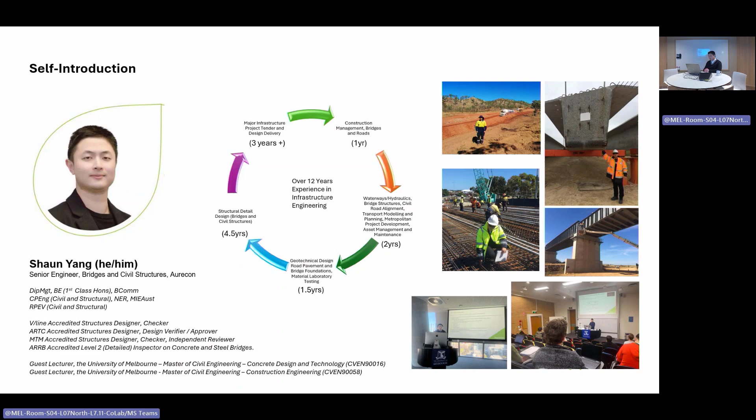Here are some key projects that I worked on in the past. I'm not going to go through them one by one, I just want to quickly go through some of the interesting aspects throughout my 12 years plus experience.

The first picture on the right is the Metronet Ranford Road Bridge, known to be the longest single span simply supported precast pre-stressed concrete Tee-roff bridge beam ever built in Australia. The bridge consists of 10 Tee-roff girders, each weighing about 200 tons. 3 heaviest cranes were utilized to assist with the lifting of the beam. It was one of the amazing experiences in my last 12 years career, getting to participate in tender design and then detail design and finish the construction support for a multi-billion-dollar project.

On the right-hand side is the Armadale Access Alliance underpass structures. I want to share that as a structural designer, we don't just deal with boring reinforcement details or big chunks of reinforced concrete and steel. We also work with a whole list of teams contributing to architectural design and landscape detailing, and as part of our structural deliverable, we work with urban designers to make positive contributions to the local community.

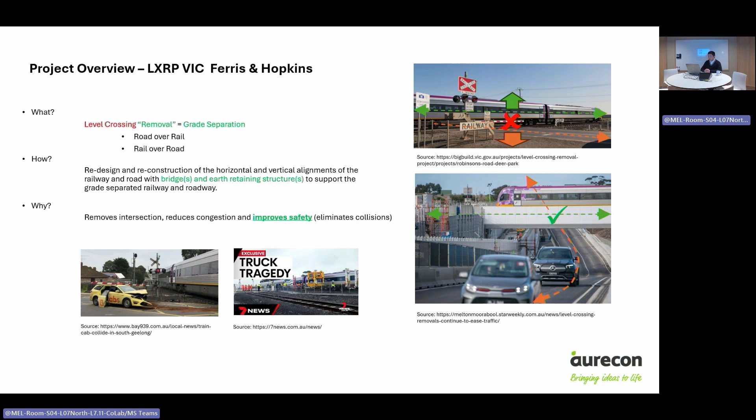This is the Robinson Road site. Previously the level crossing had the V/Line train line running, intercepting with the road traffic. Aurecon was the structural designer of this project, and we basically lowered the roadway under the ongoing train line, eliminating the potential collision between the two alignments. This project was completed in 2022 and is open to traffic.

Aurecon delivered the design and construction support for Fitz and Rob in 2022 and 2023, and continues the design work for Hopkins and Ferris.

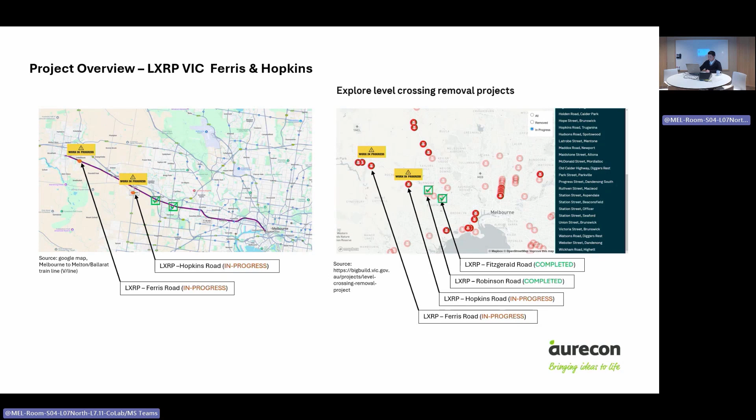So basically, the design team will propose the alignment, and then we'll come up with the 3D images, and then we'll go out there and consult with the community, the council, DTP, and the end road users. So each site can be slightly different due to its road and rail boundaries.

As you can see here, for Hopkins Road, the new alignment is actually significantly away from its existing alignment. This is proposed to accommodate the future traffic growth and future-proofing the duplication of the bridge and the road. Whereas for Ferris, due to the constrained site condition, the new bridge is pretty much adjacent to its existing road alignment.

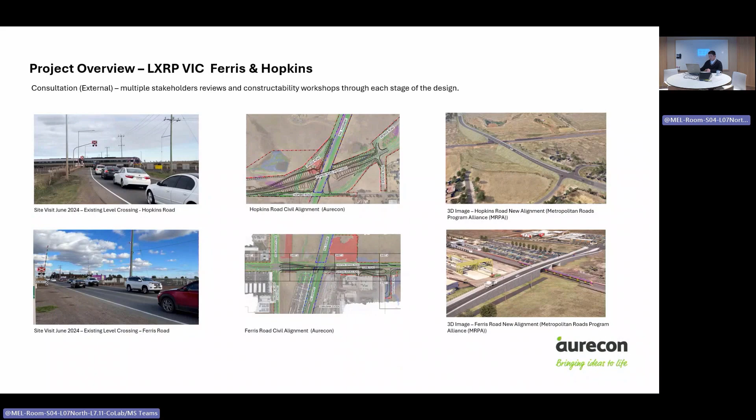Okay, so we talked about external consultation. Let's talk a little bit more about internally. As a design team, what do we do?

So bridge design is not just about providing a span from point A to point B. We have to do a lot of the design interface to make sure that we meet all the required geometric requirements, sustainability targets, durability requirements, etc.

And then we do clash detections at every stage of our design. We have to do system engineering. And then we also have collision protection assessment and workshop with our client.

Then we also need to participate in the architectural and landscape design. Like I mentioned, the bridge is all about functionality, but also we need to make sure that the aesthetic appearance of the bridge ties into the local community and ties into the local culture.

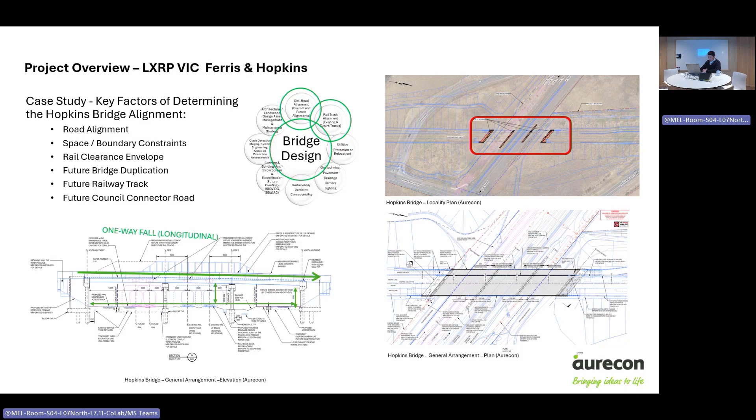So this is our governing location to set out the bridge. And then this information needs to be communicated with our civil and rail team.

From Civil's perspective, the civil design team will provide us a design string in Civil 3D, which shows the reference points at the top of the asphalt adjacent to the curb. The rail team will provide us the top of the railway track, and the required rail clearance envelope. Then it's up to the structures team to assess what's actually happening between the two.

The structures team needs to come up with the physical depths of the superstructure, and we also need to understand the behavior of the pre-stressing girder in composite with the deck slab, and how it behaves in the long term due to concrete creep, shrinkage, and pre-stressing losses in tandem. Then when there is live traffic on the bridge, how much does it sag? And what happens when the substructure settles in the long term, and how much construction tolerance we need to agree between rail and civil team.

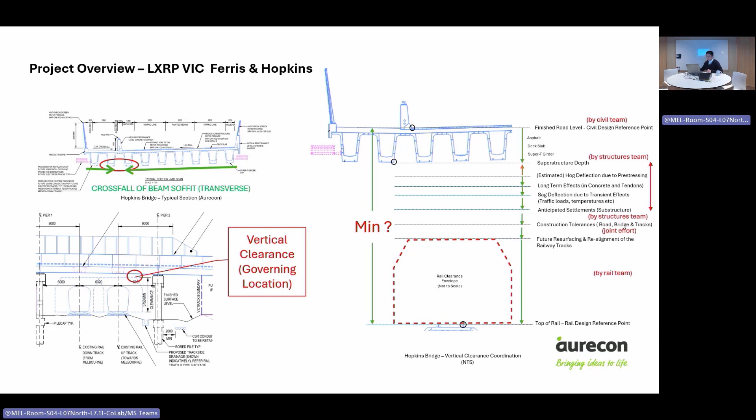So this basically gives you guys a bit of a taste in terms of design interface between internal design teams.

The 3 components get built by anticipated construction staging, workshopped with our delivery team from MRPA. The structural bridge design needs to meet all the project requirement scope and specification, and all the requirements in AS5100, which is our bridge code. The structural design considers the ultimate limit state, serviceability limit state assessments, fire effects, fatigue assessments, and so on.

So a lot of people may be asking, as a designer there are many commercial programs out there, so why do we choose MIDAS? Just as you start getting familiar with how to use MIDAS, MIDAS has a new fancy program called MIDAS NX. Why do we continue changing it? I'd like to share from an end user's perspective.

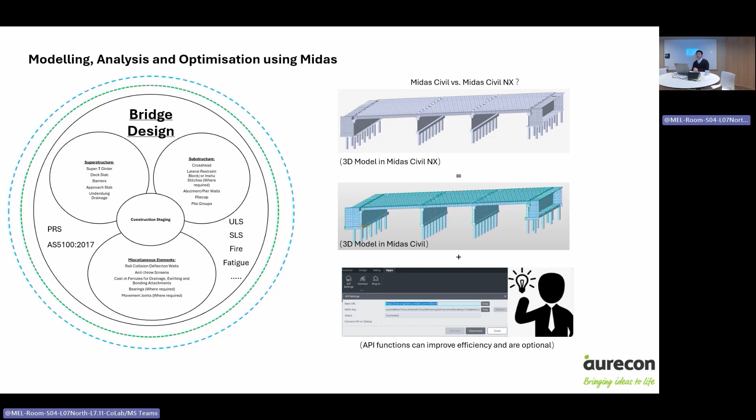MIDAS NX is pretty much MIDAS Civil plus API functions. So any MIDAS Civil models can be operated in MIDAS NX, but API functions can only be operated in MIDAS Civil NX. These API functions are here to improve efficiency where required, and they are optional.

Before we get into the modeling using MIDAS, I want to highlight that this presentation is not about how to use MIDAS 101. I'm here to provide some insights into how the MIDAS program can benefit our day-to-day bridge design as a MIDAS end user. I do not believe I can do a better job than the MIDAS support team or the MIDAS IT team.

When it comes to teaching beginners how to use the MIDAS program, there are many useful tutorials, and I do not wish to embarrass myself here or repeat steps that you can easily find online. My philosophy is always that as a design practitioner, we learn on the job and solve problems by picking up design skills.

So I want to spend most of the time focusing on the end results - how do we actually implement some of the features available in MIDAS to help improve our design efficiency and accuracy? First of all, just like at the start of every single job, when you get into a new design project...

I always make sure my team of engineers is aware that MIDAS is a design program here to help us, but the designers or end users should be responsible for the accuracy of the model they produce in MIDAS. We can't simply blame a black box when we're not sure, and think we'll just click the button - garbage in, garbage out - and get the job done. That's always not the case.

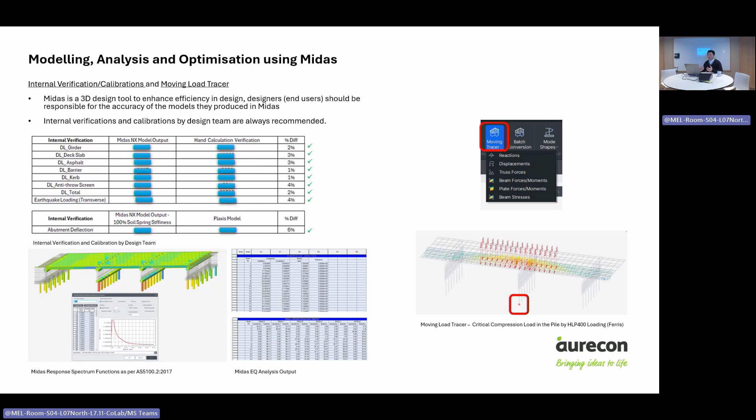I'll go a bit more into this function just to talk about how MIDAS differentiates itself in this area.

Okay, so I mentioned that we're going to talk about the moving load tracer. MIDAS offers this moving load tracer, but in addition to a common feature that you can find in other programs, MIDAS also helps us fast track how we fit the critical or corresponding load pattern into the next stage of our design.

Back in the days when we carried out the design of a bridge superstructure and substructure, when the bridge is simply supported on bearings and supported on substructures, we may choose a different program to carry out our grillage model. Then we record the reactions and manually input that into our 3D substructure model. This is time consuming and has potential for errors due to human error.

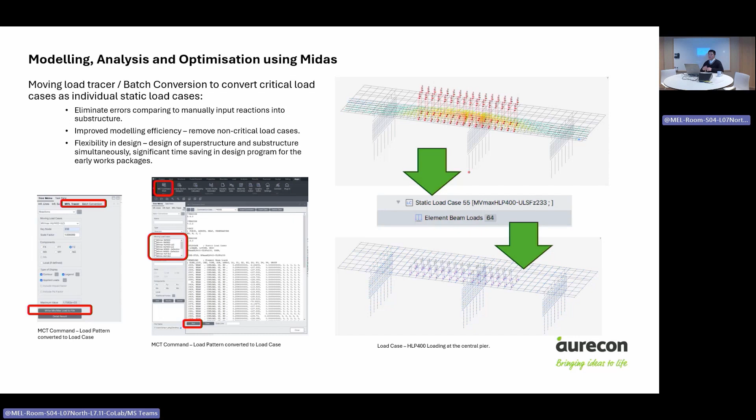Another very powerful feature of MIDAS is the construction stage. I'm sure everybody is familiar with this function, so I'm not going to go through the steps of how to set it up. I just want to quickly show some of the main steps we actually use in our design.

Starting on the right here, the first one is the substructures only. Using this stage, we can introduce a sub-stage to look at how much backfill and how we backfill behind the abutment wall, and see what the actual design deflection is versus the allowable deflection. We were able to workshop with our construction team and come up with the most optimized construction sequence.

The next stage is when the pre-stressed beams are lifted in place, simply supported on the bearing. We'll then have the wet deck concrete loadings. Again, because we separate the stages and understand the support conditions, we were able to accurately reflect the wet deck concrete loading to align with our actual deck casting sequence.

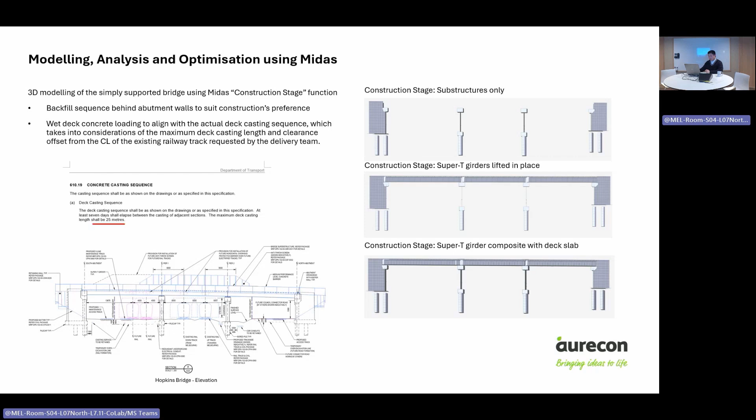The deck casting sequence needs to comply with the DTP specification 610, with a maximum casting sequence length of 25 meters. We also workshopped with our construction team to make sure that the joint between stage 1 and stage 2 achieves the minimum offset requirement from the existing railway track, and that was then captured in the 3D model.

So some of the interesting findings that we got from the 3D model. First of all, I want to mention that because it's a 3D model, it helps us look at how the structure is behaving in multiple dimensions, instead of just the 2D model that we're showing on the left-hand side here.

One of the main findings was that because of the heavy skew with 8 to 9 meters of backfill at the back, and the significant cantilever abutment wing wall constructed monolithically with the abutment wall, the soil pressure with the load combinations specified in AS 5100 Part 2 actually causes a push and pull effect, causing significant tension in the piles at the back end. This would never be clearly defined if we simply had a 2D element modeled in a 2D plane. That was one of the very critical benefits we got using a 3D model in MIDAS.

In addition, we also need to assess the anticipated deflection of the abutment wall and make sure that the deflection meets the DTP BTN 023 foundation and soil supporting structures requirements.

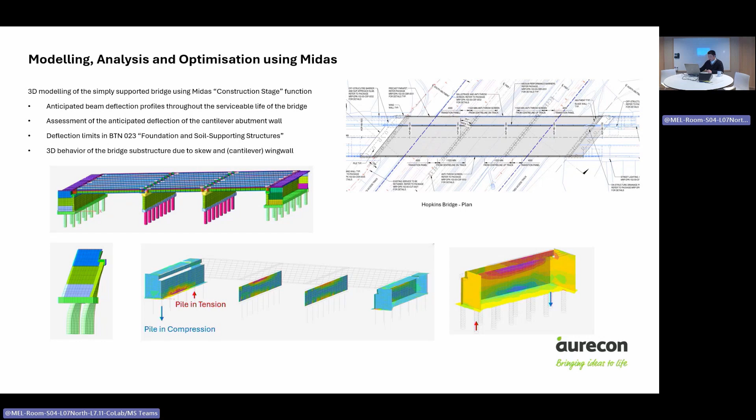So the next one is moving on to the Ferris Bridge. Ferris Bridge is a continuous two-span bridge, continuous at the central pier, integral at the bridge abutments. The construction staging again helped us understand the backfill sequence and the limitations we needed to workshop with the construction team. Then we again looked at the 3D behavior of the bridge due to the skew, the integral abutments, and the continuity at the central pier.

This is not optional because as per the DTP BTN 010 integral or semi-integral bridges requirements, we actually need to investigate the creep, shrinkage, and differential temperature settlement, and also earth pressures in stages, making sure we cover both the short-term and long-term effects for an integral bridge. This is why we modeled the 3D models for Ferris Bridge as well.

Some of the interesting findings based on the 3D model: first of all, if today, without the construction sequence, we just proceeded with our grillage model with frame action, then the frame would recognize the composite behavior from day one, meaning the weight of the deck slab would be supported continuously. What this actually does is reduce the actual sag bending and create an unrealistic hogging bending at the central pier as well as the abutments.

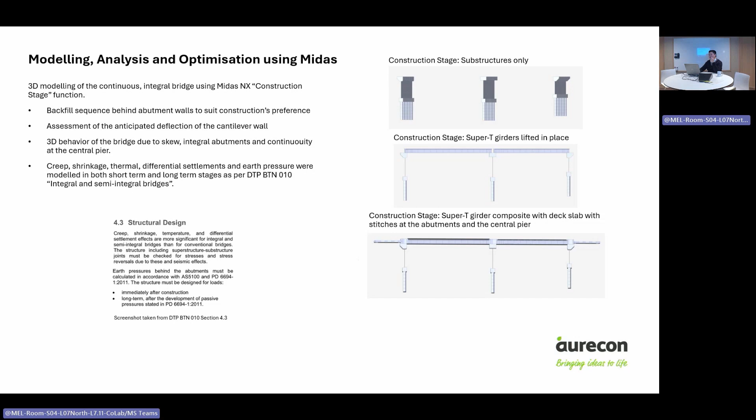As we all know, Super T girders are great with resisting sag bending moments because we can put more and more strands, multiple rows of strands, at the bottom flange of the Super T. But the Super T composite section is weak, or not as efficient, in resisting hogging moments. This is one of the typical challenges we have when we have a continuous bridge.

A lot of the reinforcement needs to be squeezed into a very narrow 200 mil deck slab, which is this area here. So by having clear construction staging and a clear wet deck sequence, we were able to find out the actual realistic sagging moment, which made sure the Super T were not under-designed for the midspan sagging. We were also able to detail and provide very efficient structural detailing for the deck slab at the critical hogging zones at the pier as well as the abutment.

This bridge was also assessed in close detail for fatigue assessment, because there is a rigid moment transfer at the pier as well as the abutment, with multiple sectional property changes as we progress throughout this support location. We found that the fatigue assessment basically governed multiple locations at the bridge pier as well as the abutments.

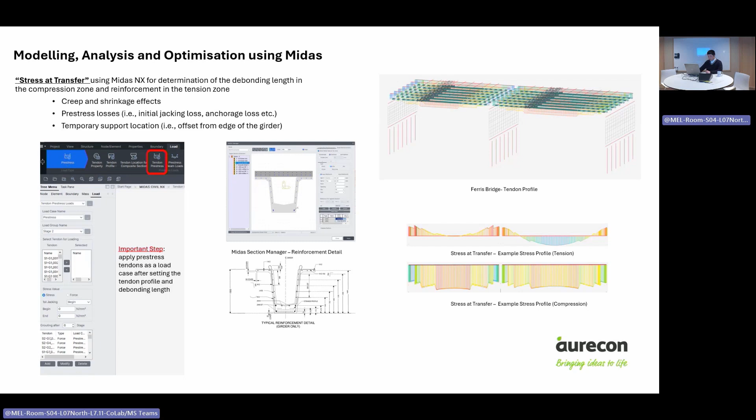Look, this is what I always talk to my teams, the junior engineers, is MIDAS needs to earn our trust, just like any program. So we need to carry out our own verification to satisfy ourselves that the output generated by MIDAS is satisfactory to the design team. So stress at transfer is not difficult to verify.

We just have to consider the three main components: the axial compression due to the tendon, the moment, the clockwise moment due to the tendon force, and the eccentricity to the girder. And we also need to consider the self-weight of the girder.

And on top of that, we need to make sure that we calculate our stress development and the transmission lengths as per 5100, pre-stress losses, short-term and long-term as per 5100, and align with our MIDAS input, and also consider the modular ratio transformed between concrete element to steel elements in the calculation of the neutral axis.

And again, very lastly, to everything above this point, we will get an approximate stress. With assessments of elastic deformation losses, we will get results pretty closely aligned with what we can model in MIDAS. So this is just to assume that compression is taken to be positive and tension is negative. We can quickly run these calculations in our own Excel spreadsheets to verify the output.

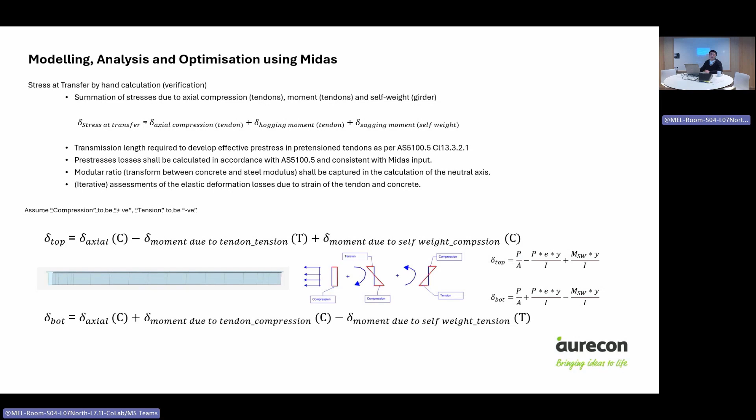Basically, start documenting when the girders get manufactured, stored on the storage yard, and then lifted on site, lifted into place on the bearing or stitched with the continuous structure. And I also listed out how it's actually relevant to our design.

So for example, at stage 2.2, when the girder gets lifted onto the elastomeric bearing, then we need to make sure that the set out of our bearing level and the pedestal levels have been checked and are meeting the design intent. Then we also have stage 3.3.

So deck slab achieves the strength and achieves a full composite section. So when you calculate the beam, the superstructure deflection, you need to consider the composite section. And then lastly, in the long term, during the entire design life of the bridge, which is usually 100 years design life, we need to make sure that the bridge does not encroach into any rail envelope.

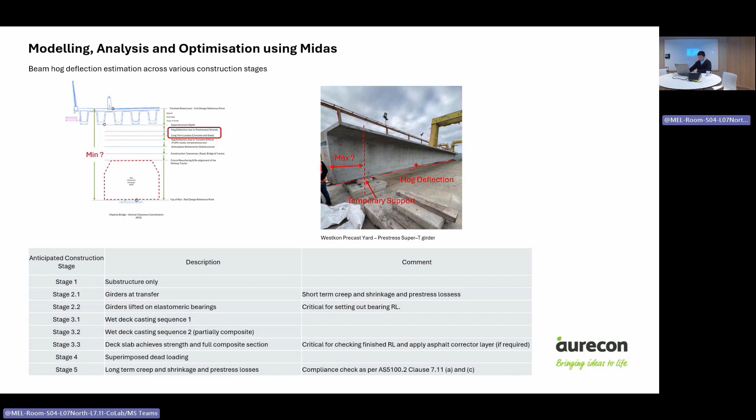Okay, so this diagram here basically gives a bit more intuitive understanding of how the pre-stressed girder works. So starting from the second line here, the girder gets manufactured and stored on the precast yard.

Then the concrete is still developing strength, and also creep factor comes in. The development of the beam hog is still continuous. Going to the second line here.

Then just before the wet deck concrete gets poured, it will achieve the highest hog of its serviceable life. Then once you have the wet deck concrete, it will then compress and cause the beam to sag. And then once the deck achieves its required strength, it becomes a composite behavior.

So the Super-T girder composites with the deck slab structurally. Then we have the superimposed dead load. So this is the barrier, the parapet, asphalt, asphalt corrector layers, etc. So then that will cause the beam to sag even further.

Now, the bridge will then open to traffic once all the road furnitures are in place, and then we will look at the long-term concrete creep and shrinkage and pre-stress losses throughout the design life of the bridge.

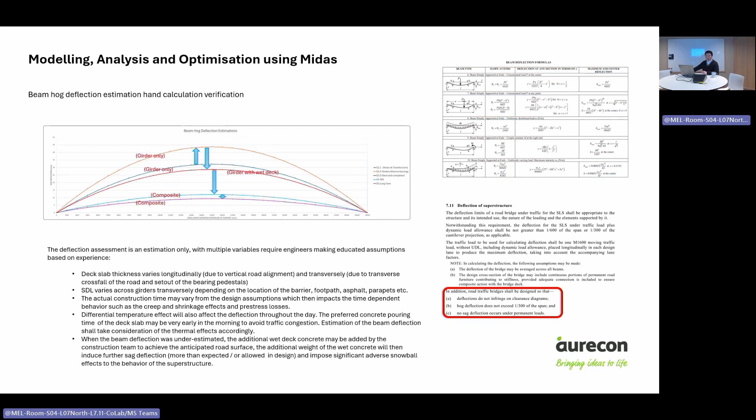We need to make sure, based on our experience, how much contingency and additional structural allowance is needed, working with our team to ensure that under permanent loads, this line does not fall below zero.

So, how can MIDAS help us? Once we understand our construction sequence and know what we want to understand at each staging, we can model these 3D effects in the MIDAS program. The beam hog deflection has been modeled in MIDAS to account for concrete creep and shrinkage, pre-stress losses, the varying deck slab, the skew of the bridge, and the differential temperature effects.

On the left-hand side is a quick example showing that the deck slab of the Hopkins Bridge actually varies significantly both longitudinally and transversely, a total of 90 mils difference between the western and eastern edge. When we model that in the design program, we find up to about 5 millimeters difference in the hog deflection.

On the right-hand side, we model the hot-top and cold-top thermal effects as individual load cases to see how much change occurs due to these thermal load cases. Below that is an example of the Ferris integral bridge, showing the beam hog at a specific construction staging.

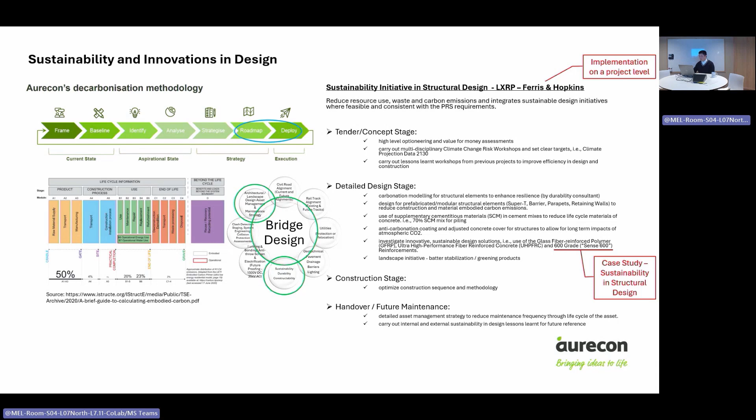Okay, so the case study using Sense 600 reinforcement in the rail collision deflection wall. This is pretty much basically instead of using the grade 500 reinforcement, we're now using the 600 reinforcement. This is likely to be the first time we use the 600 grade reinforcement in a level crossing removal project.

I think it's worth mentioning big acknowledgement and recognition to the asset owner DoT. They have been very supportive and provided requirements and guidance to work with the design team, and also helped us go through the formal approval process and made it happen. There were some specific requirements around manufacturing welding procedures, and we were able to workshop that with the construction team, with the asset owner, and get agreement among all the parties.

The rest of the photos here show that the deflection wall has been modeled in a geotechnical pile group model, calibrated for the soil spring, and used for the design actions for the rail collision. On the right-hand side, the structural model in MIDAS 3D with the spring sensitivity assessment, just to make sure that we capture the dynamic behavior of the rail structure interaction.

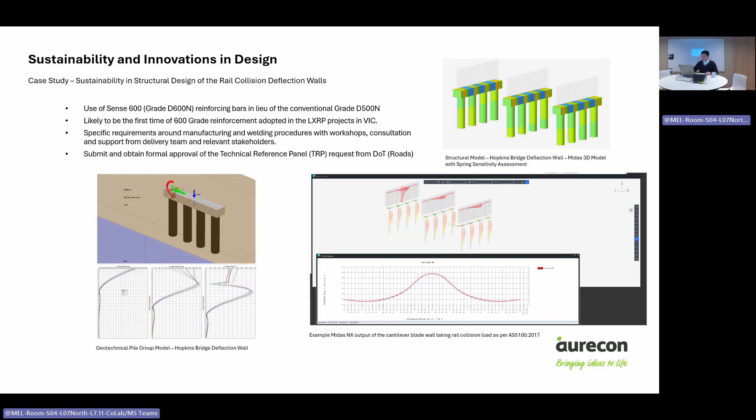So how does Sense 600 deliver a lower embodied carbon construction solution? First of all, it's a code compliant product manufactured here by InfraBuild. The SENS 600 is made out of 100% recycled steel. It uses approximately 16.7% less raw material to produce the product with the same load capacity compared to grade 500. The adoption of SENS 600 can reduce the embodied carbon in a structure by up to 39% through weight reduction and recycling.

This is just a couple of photos showing that they look slightly different in terms of shape. InfraBuild also provided us a conversion table to show that if previously we were using grade 500 for structural detailing, what is the equivalent in the 600 grade reinforcement.

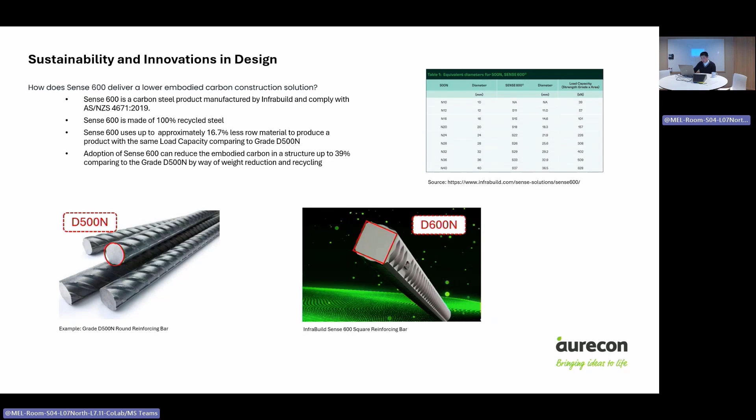Now, as the structural designer, we need to make sure that every time we adopt a fancy new sustainable solution, we capture all the flow-on impacts. So as the structural designer for SENS 600, we also need to make sure we understand what is changing between SENS 600 and grade 500.

So the SENS 600 obviously had the increased yield strength, reduced steel cross-section, which is provided in this diagram here. We have to go check the revised calculation of the longitudinal strain and the coefficient KV.

So AS5100 adopts the modified compression field theory for shear, torsion, and moment combined design. We need to understand how that impacts our capacity calculation, and make sure we revise our calculation of the angle of inclination between the concrete strut and the longitudinal tie strain. The revised calculation of the concrete contribution and the reinforcement contribution then gets reflected and assessed accordingly, to make sure the SENS 600 is structurally adequate to resist the rail collision load as per 5100.

Okay, so we're now moving to the last part of the presentation. Very quickly, everybody has been asking me, what's the difference between MIDAS Civil and NX? We'll quickly step through that.

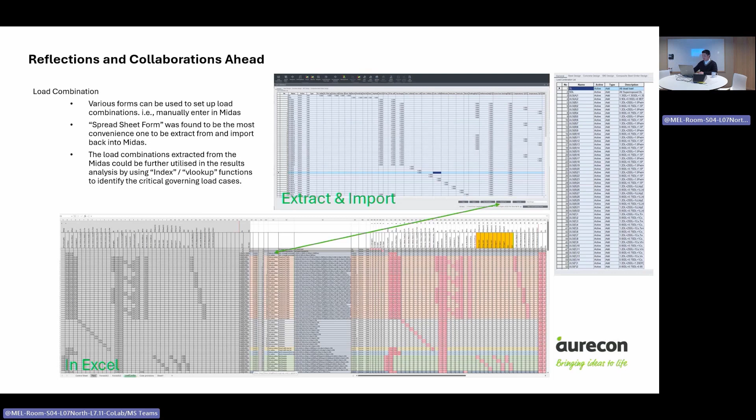The next one is MIDAS also offers sorting out the results, instead of extracting into Excel, which gives you a little bit more flexibility, but it's more time consuming. It allows you to actually filter through all your calculations within MIDAS.

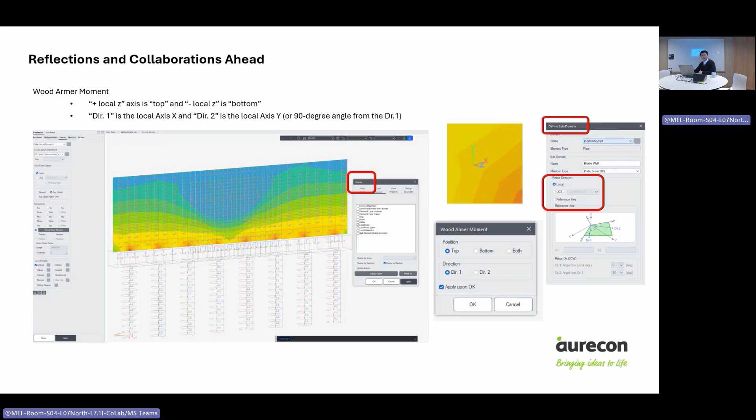And we also use Wood Armer Moment quite a bit for detailing of moment elements subject to bending. I've basically listed out the default setting within MIDAS, and obviously if designers require to overwrite some of these default settings, MIDAS has already provided these options.

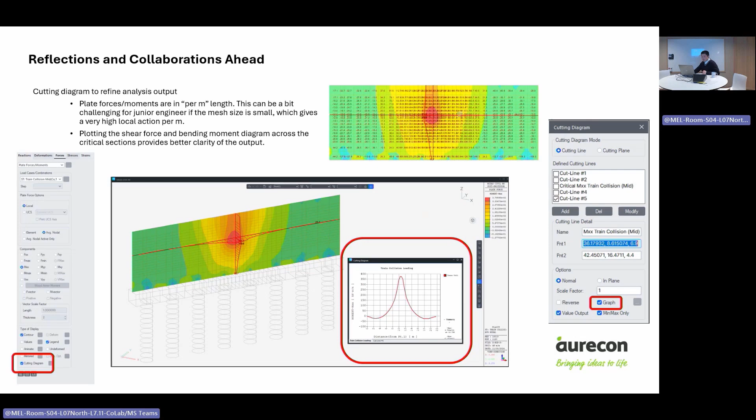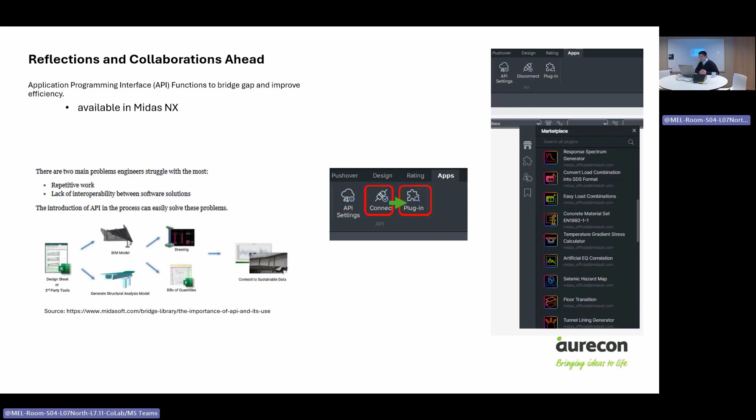Okay, so very quickly to wrap up the presentation, we talked about the API, and I just want to quickly showcase what the API function can do. So API basically helps us reduce the repetitive work and helps us operate between different software, calculation programs, Excel spreadsheet, etc. MIDAS has already provided a very comprehensive marketplace to showcase these API functions, and to fast track a lot of the design process.

I'll use myself as an example. I asked a lot of questions. So in 2022, MIDAS gave a presentation to all the design teams here in Melbourne. David and Connor actually gave us a very amazing presentation. I start asking questions, I start asking about functions.

One of the questions that I raised was, when we look at an envelope with 100+ load combinations, how can we quickly pick up what's the governing load factor and what's the load effects? So MIDAS was able to develop the associated API functions to enhance their performance. So Connor actually came back to me this year and said, look Shaun, I haven't forgotten about you, and this is the function that we created under the API marketplace, feel free to give it a go.

The program is very straightforward. Once you run the 100+ envelope, you can easily import the load combination and pick the element of interest, then select whether it's a bending, shear, or axial that you're interested in. Straight away it will then convert that into a load case in the load combination with all the associated factors for ULS or SLS combination.

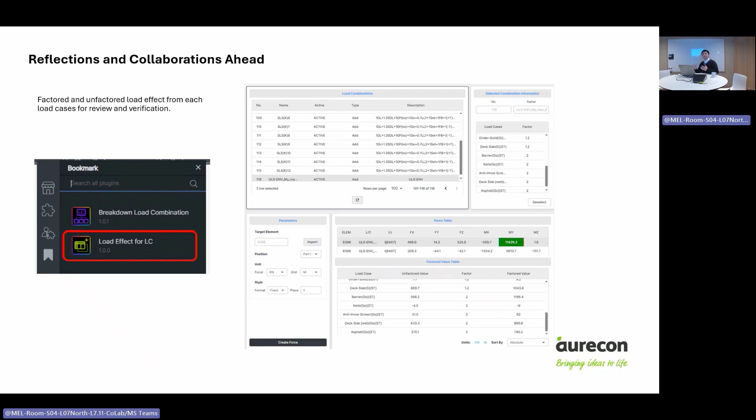In addition, what if you want to see the factored and unfactored breakdown of each load? How does it actually govern? So MIDAS also created a load effect for the load cases. This is a quick showcase where you can simply select this governing load case and select the element that you're interested in and confirm the units. It will give you the breakdown of each individual load that contributes to this governing design action.

Okay, so that was two very simple examples. Now I'm going to show you guys a bit of a game changer, a bit of a complicated API function.

So by pressing a single button, this PSC bridge model and analysis API function will be able to create a very complex, skewed, continuous bridge with longitudinal and transverse elements defined, with load cases, ULS, SLS, and load combinations, everything in one package by pressing one button. This is significantly more advanced than going through a manual modeling or a wizard.

And then by pressing another button, it does the automatic extraction of the results and the results diagrams, which enables a whole lot of functions that we can now use to fast track and automate a lot of the design process for bridge modeling as well as for structural detailing.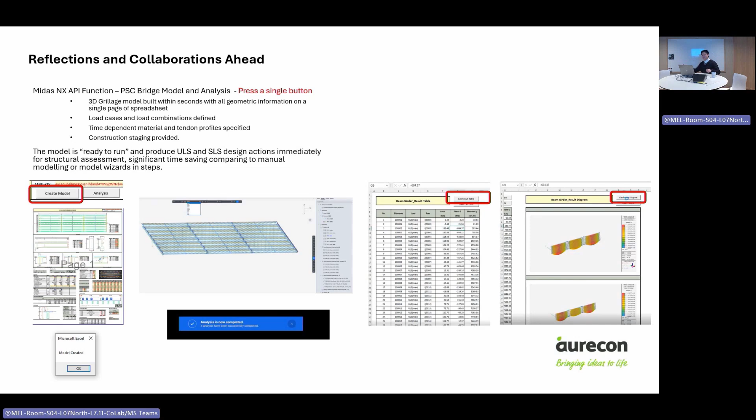And like MIDAS said, the sky is the limit. So moving forward, I think it's like the Tesla automation in driving. The machine learning needs more data. The designers need to provide more design data to optimize our designs, streamline the bridge modeling process, identify the gaps, and then customize the API function to achieve automation in design, with first principle verifications and responsibility by the designers, of course.

That's pretty much the end of my presentation. I'll quickly show a video that I obtained from MIDAS to show everyone that if you still have questions after going through all the online training tutorials, you can quickly log onto the MIDAS website, get help, click the program you're interested in, and submit your query. Usually they will provide a response within 24 hours. I can't promise on their behalf, but they have been providing very amazing support during our detailed design so far.

And that's it. Thanks for attending today's session. I hope everybody has learned something new and has some takeaways that you can think about after this presentation. Thank you.

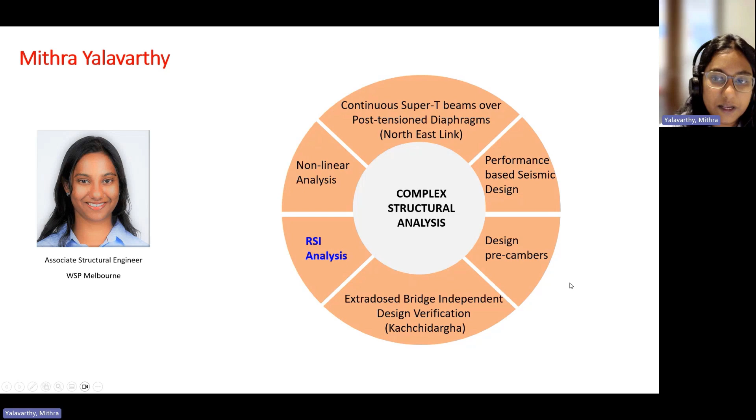Hi everyone, I'm Mithra Yalavarthy. I'm from WSP Australia, an associate structural engineer. I mostly work on complex structural analysis, either design leading the structures or being involved in complex engineering. I've done continuous super T beams over post-tension diaphragms in North East Link, with 40-meter spans of super T beams on either side, combined with a post-tension diaphragm transversely. I've also done extradosed bridge independent verification in Kachchidargha, nonlinear analysis, geometric and material nonlinear analysis, performance-based seismic design, pre-cambers, and RSI analysis, all using MIDAS Civil. I've been using MIDAS Civil since 2016.

So here is an overview of my presentation. How to do RSI is a simple aspect, but why to do it and how to mitigate is the one which will actually take a lot of time to learn. So today I will be concentrating on both of them, apart from giving a case study on Parkdale Viaduct.

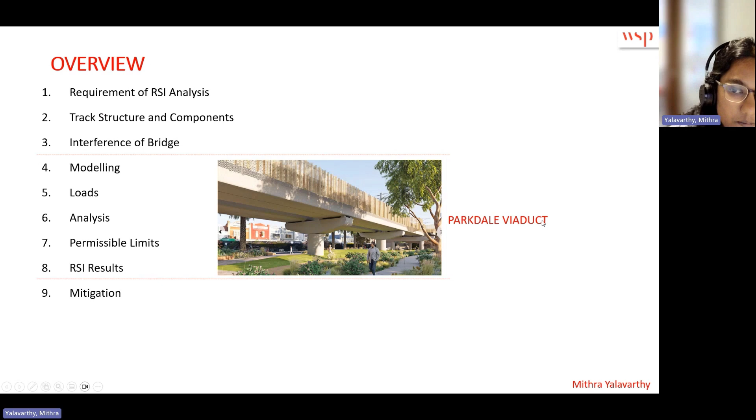So why do we need rail structure interaction analysis? We need this because we should know the distribution of longitudinal forces, and also we need to ensure the safety of the track systems. The difference between road bridges and rail bridges is the rail, which is connected stiffly with respect to the embankment as well as the bridge. That helps it act as an additional element in distributing the forces.

So we need to know the track structure and components before we go to RSI analysis. In rail bridges, we have a rail connected to the sleeper by means of a rail fastener. This arrangement can be sitting either in ballast or in the form of concrete. Here is an example of an MTM viaduct with ballasted track, and this is Dubai Metro with a trackform plinth.

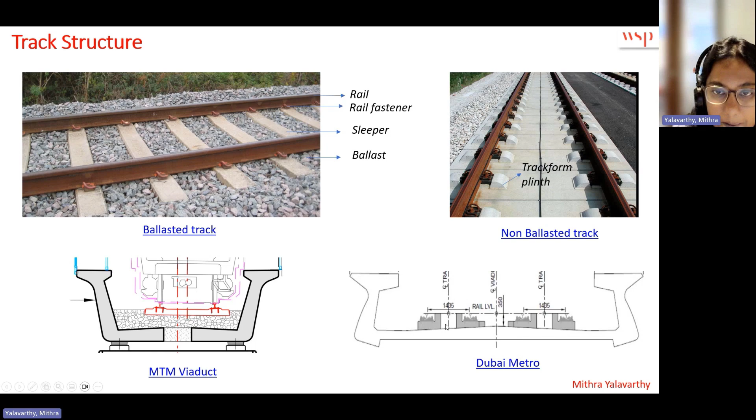In Australia, we use A60 rail sections with a height of 170 mm, a proof stress of 420 MPa, and UTS of 880 MPa.

It has a head, web, and foot, and this part we call the toe, where the fasteners put load onto the rail section. The standard rail lengths are usually between 12 to 14 meters, joined by means of fish plates like this.

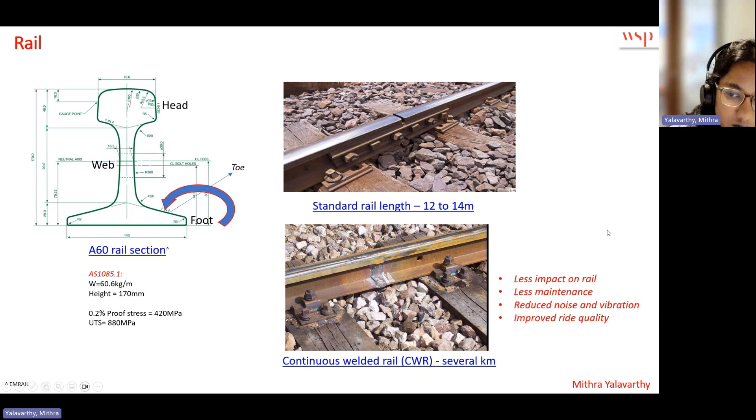In a continuous welded rail, the two parts of the section are jointed by means of a weld. This has less impact on the rail, less maintenance, reduced noise and vibration, and improved ride quality. In most current rail projects in many countries, we are using continuous welded rail, which can span up to several kilometers, with 3 to 4 kilometers being a normal range for CWR.

The sleepers are usually placed at 685 mm spacing, with a general track gauge of 1600 mm in Australia.

This is a part of main interest to us, which is mainly used in rail structure interaction analysis. This is called an E-rail clip, and this is an SKL clip.

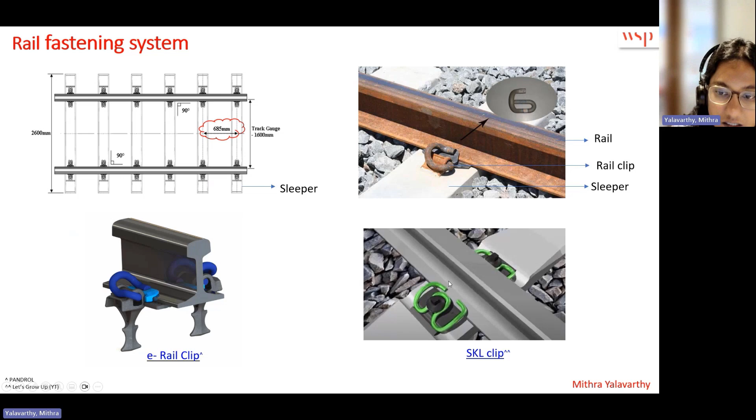The E-rail clip is a defined elastic clip steel spring, which produces a clamping force of approximately 20 kilonewtons per pair of fasteners. The horizontal resistance generated between this clip and the rail is what generates the friction between those two items.

That friction will be approximately 7 kilonewtons for mainline tracks and 9 kilonewtons for high-speed tracks, all dependent on clamping force. Because of the predefined clamping force of the E-rail clip, it has a predefined limited horizontal resistance. In case we want a better fastener with better frictional forces or clamping forces, we can use alternatives to the E-rail clip.

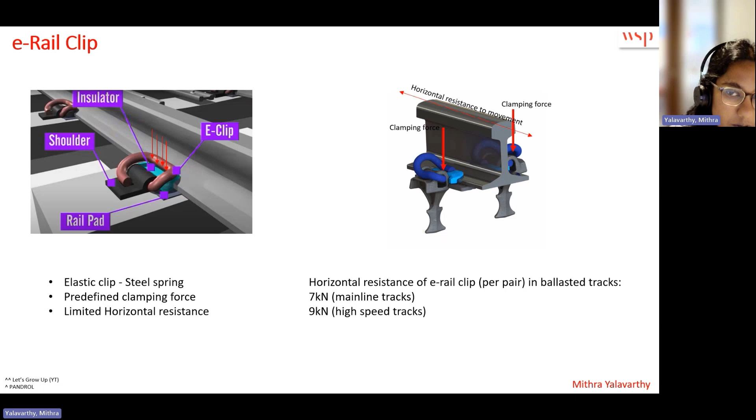Track stiffness is generally based on the type of fastener being used, whether it is ballasted, frozen ballasted, or a non-ballasted track, whether it is a loaded or unloaded track, and whether it is a good or moderately maintained track. Out of these three stiffnesses, the one which connects the sleeper and the ballast is the weakest.

Track stiffness parameters: in a ballasted track, the resistance will be 20 kilonewtons for an unloaded track, after which the rail continues to slip. For a loaded track, it will be 60 kilonewtons.

This rail clip will offer frictional resistance up to 60 kilonewtons, and after that it will simply slip, meaning it will slide off. That is called rail slip.

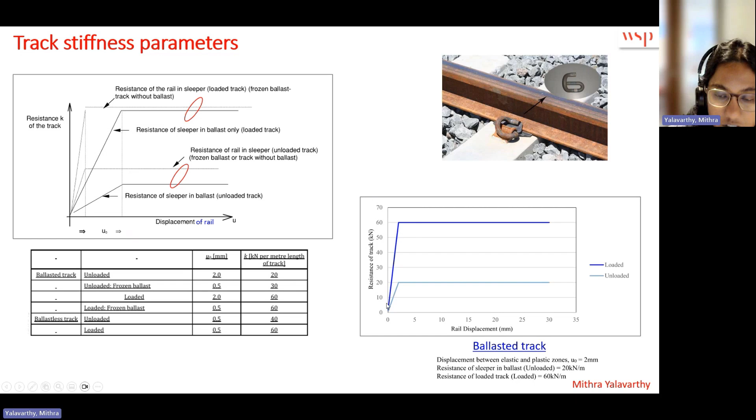Regarding interference of the bridge: in a simple CWR on ground, if the temperature changes, it's accommodated with the rail expansion joint. Considering all this as stiffness, after a certain point there will not be any movement, because the number of sleepers and rail clips will be able to resist that movement, and the rail will be in a form of pure stress.

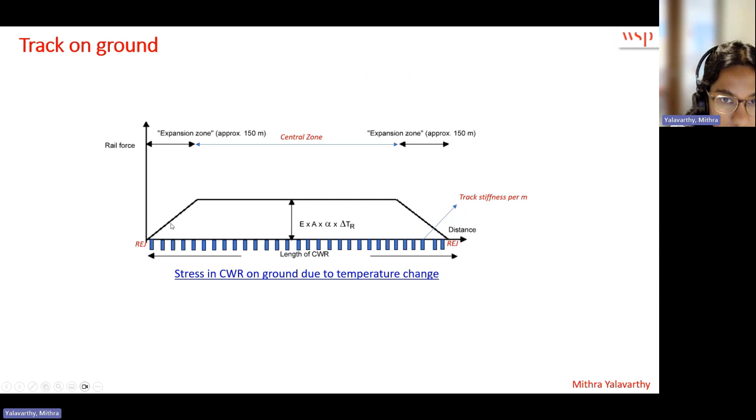Whenever we introduce a bridge in the central zone—this part is called the central zone, and this part is called the expansion zone—if there is a temperature change, the rail will try to move, and because of that there will be stresses here and here.

So in a CWR track, we are introducing disturbance because of our bridge. Whenever the bridge is bending, that will also cause additional deformation, which causes additional stresses over here.

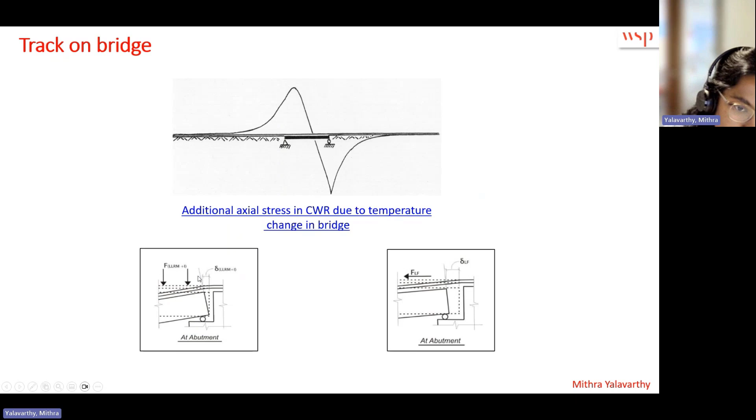In the same way, when the bridge is sliding because of our bearings, it will slightly slide, which will cause additional stresses as well.

I'm from Southern Program Alliance, comprising of LXRP as client, Melbourne Metro as operator, Acciona as contractor, and WSP as designer. We have successfully completed many works in Melbourne, right from the initial works of Seaford and Carrum to additional works all the way currently at Newport.

I've done RSI analysis for Parkdale Viaduct, which I'll be sharing my lessons from. It is a U-trough on a ballasted track. This viaduct is around 1121 meters long with 38 spans of 27 meters and 31 meters.

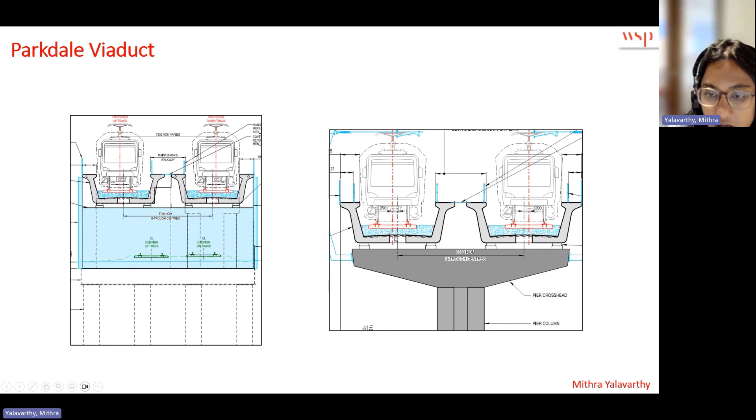So it is a ballasted track, as we can see. There are two tracks which are sitting on the pier crosshead.

Modeling in MIDAS Civil. If we consider that the substructure is done in MIDAS, then the only additional item for RSI analysis is generating a rail and connecting by means of track stiffness. For nonlinear analysis, I would prefer giving center to center. So these are the only two elements which will be additional to the substructure element.

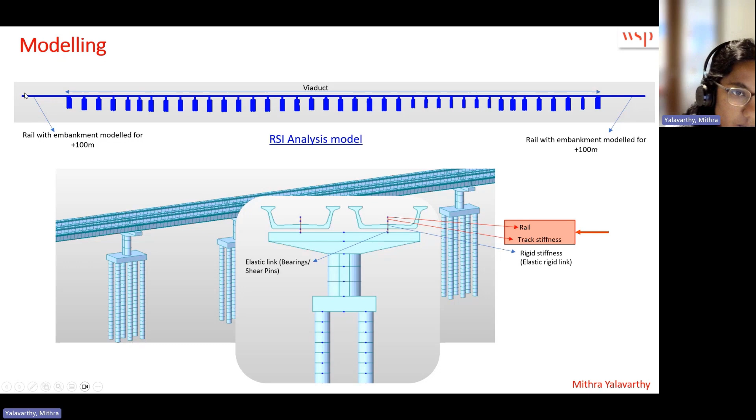The rail with embankment should be modeled for 100 meters plus on either side to avoid any interference, because when we give the track changes, we don't want any interference. So for that instance, we just model 100 meters on either side of the viaduct. So this is how we do it.

We have the superstructure elements in our model already. So we divide them into approximately 1 meter elements because the track stiffness curve we gave is usually for 1 meter. That's why we divide the superstructure into 1 meter elements. We extrude these nodes to form the rail, and we join them to form the rail element all over the top.

We use elastic links to connect the rail and superstructure, and we model the embankment in a similar way. Because the ground is stiff, we gave the stiff supports here. It is usual to give in a continuous numbering way, because this RSI modeling is heavily parametric. So it is better to make this model parametric.

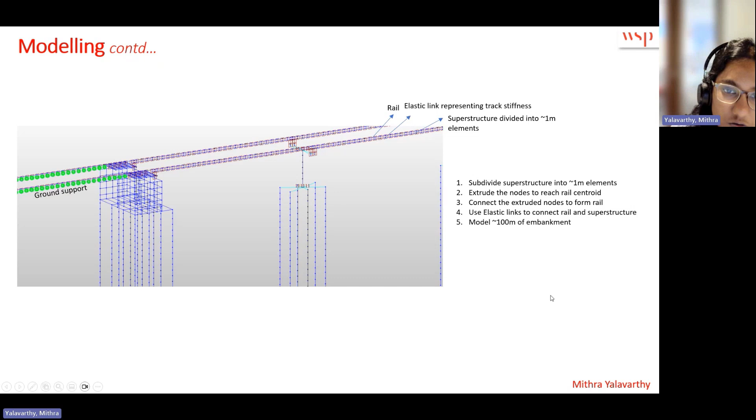The track stiffness: if this is a rail element and this is the superstructure, this is connected by means of a vertical spring, which is of a defined stiffness like an infinite stiffness. And when it comes to horizontal stiffness, that is where we give the track deformation curves.

So unloaded is 20 over 2mm, and we'll make it symmetric just to take plus and minus forces. Here it is plus 60 and minus 60 over 2mm. After this 2mm, the rail, we give the command that the rail can slip.

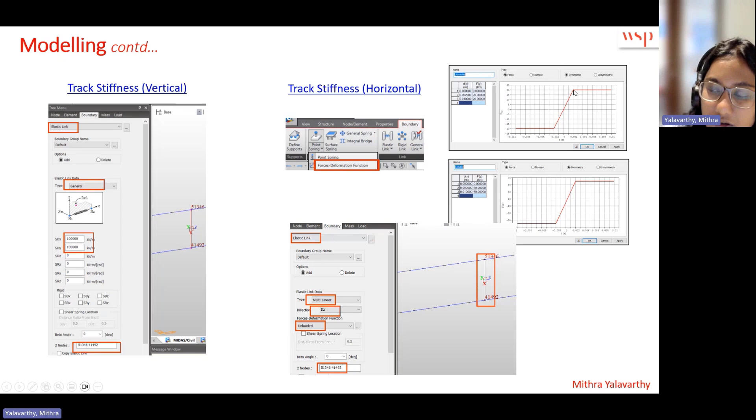Loads. If the structure is located in this central zone, we can only give the temperature variation to the bridge, because the temperature variation to the rail anyway will not get into this. But if by any chance the bridge is located in this expansion zone, then we have to give the temperature variation to both the bridge and the rail.

We can use UIC or AS 5100.5. I usually use AS 5100.2 for getting the temperature forces. In Melbourne, the temperature variation of the bridge usually goes to about plus 29 and minus 18.

The creep and shrinkage of the superstructure can also be given as an equivalent temperature load. So the residual creep and shrinkage of the girder from the point the rail is installed is considered, and that difference in strain can be converted to a temperature load, which is given as the creep shrinkage load.

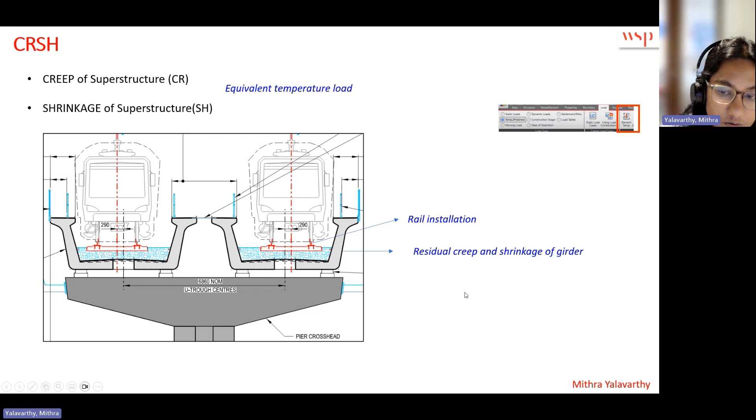Live load comprises of 3 effects: vertical, braking, and traction. These are mainly project specific requirements, depending on the type of vehicles and so on. In MTM, we have a freight train of 245 LA, passenger train of 200 LA, work train of 245 LA. In ARTC viaducts, this is 300 LA.

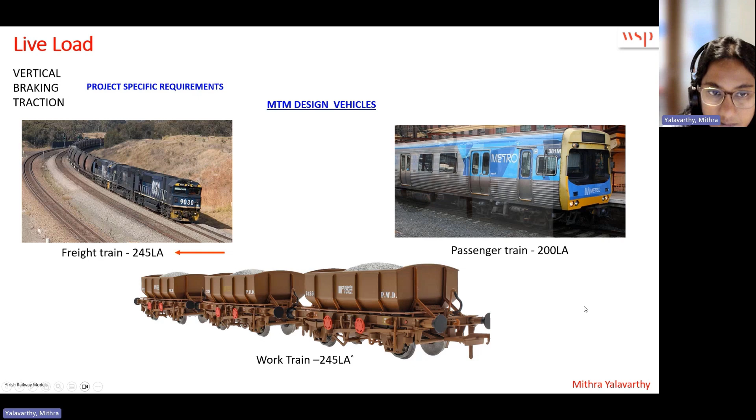The braking and traction forces can be evaluated by parameters advised by the authorities. In MTM, we have parameters for traction: the length of the train, and the acceleration and deceleration parameters, so it is force equal to mass into acceleration. If anything needs to be superseded by this, the tractive effort of the loco needs to be specified by the authorities. So we need to understand a little bit here.

This is a single locomotive train where one engine is pulling all the wagons. In a double locomotive train, there are two engines back to back, and they would be pulling the whole length of the train. In a push-pull train, one engine is at the back and one at the front, and they act in unison to pull the train.

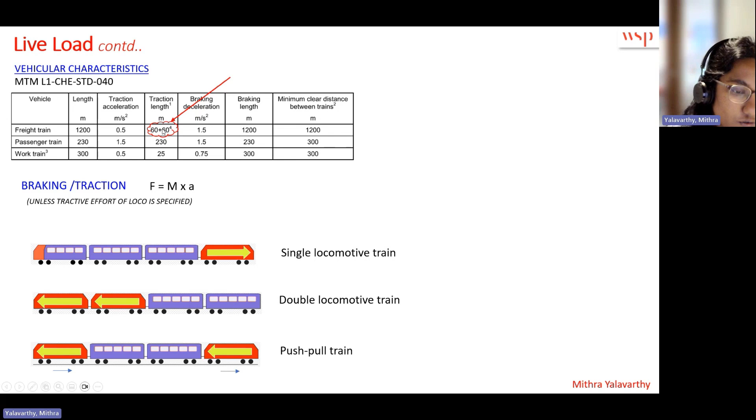In MTM, they have clearly specified that 60 meters at the back and 60 meters at the front of the traction length is to be used for traction. That 60 meters is nothing but 20 meters for each locomotive, so 3 engines at the back and 3 engines at the front.

Live load: how do we give live load? In AS 5100.2, rail load can be converted into a UDL. So that is how we use UDL for vertical representation.

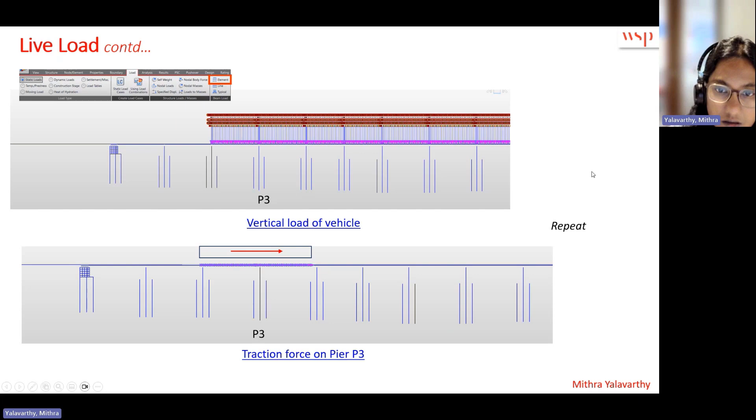In case I want to load Pier 3, I would go one pier before and load that, and for the traction force as well, I would go one pier after and load that. I would repeat this for as many piers as possible so that I would not isolate any case. So for a simple Parkdale 1000 meter plus RSI model, I have to create these many load cases for the proper iterations.

The direction of travel is also important. Whenever there is an up track and down track, the forces need to be acting in unison to create the worst effect. So braking on one track plus traction on the other track will give the worst effect in this type of scenario, because they share a common substructure. If they don't share a common substructure and are independent, that is okay. But in case they share a common substructure like this, we need to consider the add-on effects here.

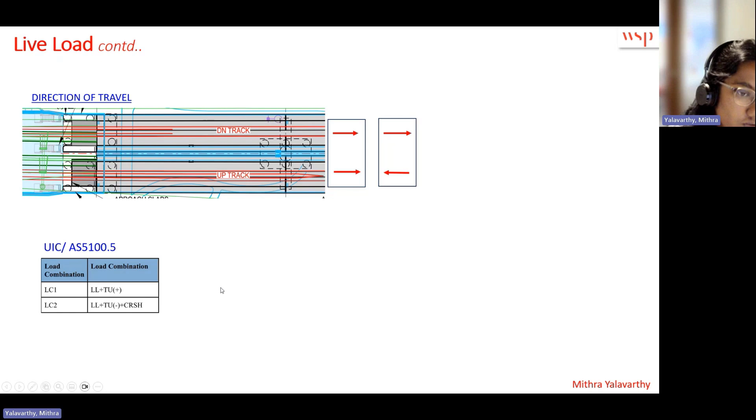And the load combinations can be taken as per UIC or AS 5100.5. Here the factor is 1, but AS 5100 has a factor of 0.7. So either can be used for RSI analysis.

So unloaded springs are used for temperature and creep shrinkage, and loaded springs are used for live load, braking and traction. So there are two types of analysis that can be done in MIDAS.

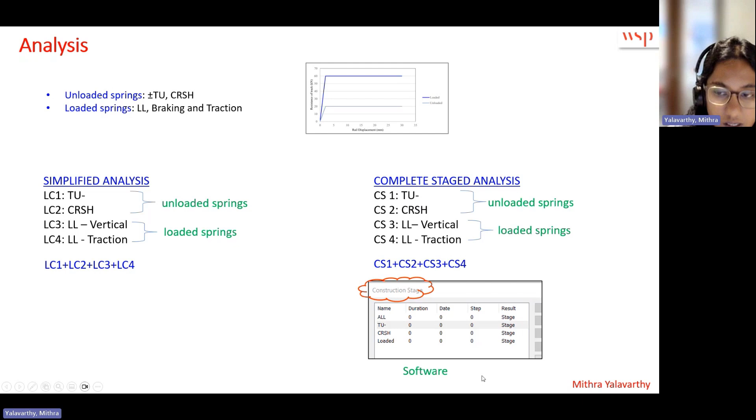Simplified analysis comprises of adding different load cases. We give different load cases and we can combine them to give us a value. In complete stage analysis, what we do is we create different construction stages, and these will act in unison to give a particular combination. This we can do only in softwares.

So what is the difference between simplified and complete analysis? If we consider that 20 kilonewton is a limit for unloaded track and 60 for the loaded track, this simplified analysis will use 60 plus 20, 80 kilonewton. The more the stiffness of the fastener is, then we generate more stresses and we generate more loads.

In complete analysis, what it does is it will stop the analysis at 60 kilonewton. So whenever there is a problem with the stresses not being compliant or the deformations not being compliant, then it's better we test the analysis with complete analysis.

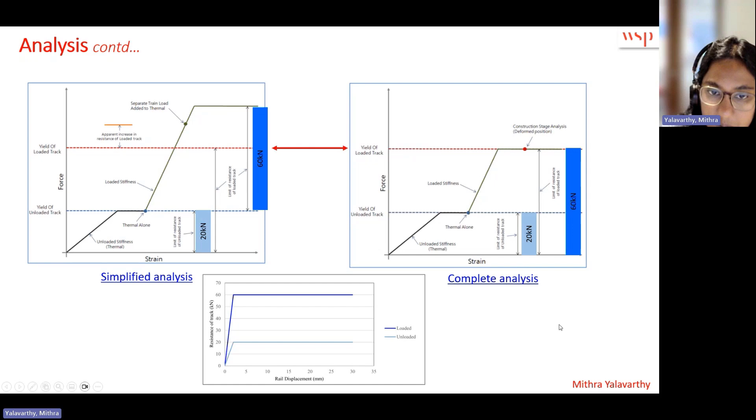So for analysis method, simplified analysis is usually what is recommended, but there will be critical cases where the maximum stresses or maximum deformations would be there. In such a case, we isolate the cases and we create complete stage analysis for those particular cases. Sometimes it will be beneficial to use that, sometimes the number might slightly increase. So we end up with having the correct number using complete staged analysis.

Range of stiffness - this particular RSI analysis is quite sensitive, so we have to use different system stiffnesses. Upper bound stiffness of the system is used for extracting shear forces, and lower bound stiffness of the system is used for deflections and stress.

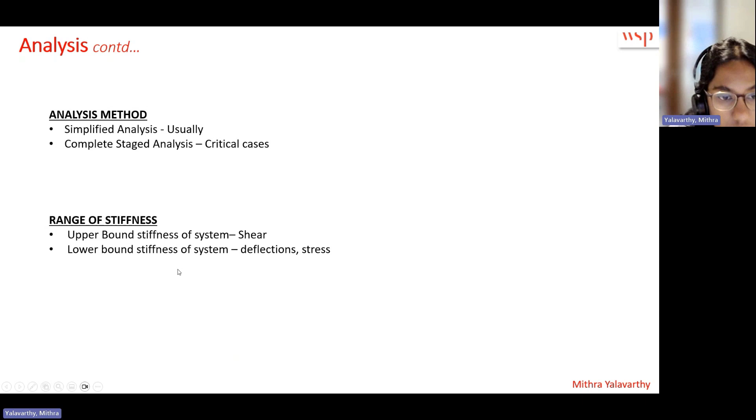So how do we do that? Upper bound stiffness has uncracked properties and upper bound stiffness of the soil. And the lower bound stiffness of the system uses the cracked concrete properties and lower bound stiffness of the soil. Unless the most probable stiffness is given by geotechnical engineers, we need to use two different stiffnesses of the soil as well.

Permissible limits: the additional tensile stress in rail is 72 MPa and additional compressive stress in rail is 72 MPa for ballasted track. For non-ballasted track, this can go to 92 MPa. This is in stark contrast to how much stress we have - 420 proof stress in the rail. The thing is, this is the stress limit given due to the interference of the bridge. There will be tensile stresses in the rail because of temperature and all, apart from that the rail would be experiencing this stress. So this is the limit which is tested by bridge engineers in general due to interference of the bridge.

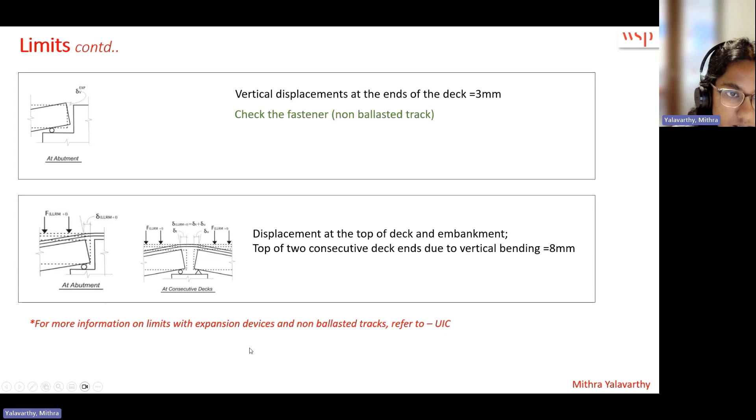RSI results: this is a U-trough with 27 and 31 meter spans. Here we can see the distribution of the forces of temperature and creep and shrinkage. They're more dictated towards the abutments because I have fixed them. This is a free pier, but the pier adjacent to that is again attracting a lot of force over here. In traction and braking as well, we can see that the abutments are attracting more force here.

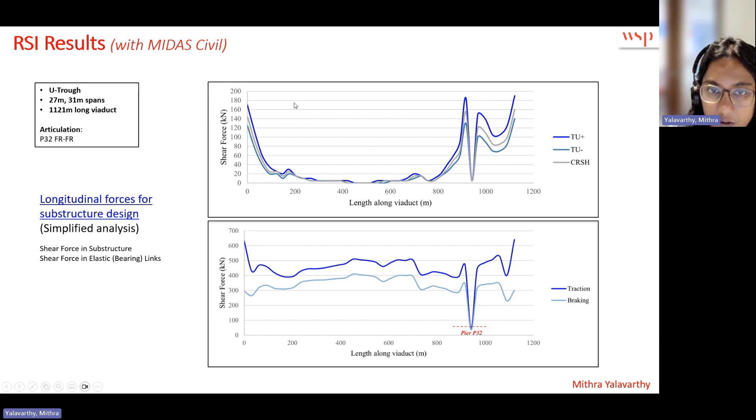So this sort of estimation cannot be achieved by using empirical methods. This is a more realistic assumption that the forces can be predicted using only RSI analysis. It takes care of soil conditions, interstructural stiffness between the piers and abutments and the embankment. So this is the main focus of RSI analysis, that we need to consider this inter-stiffness between the piers.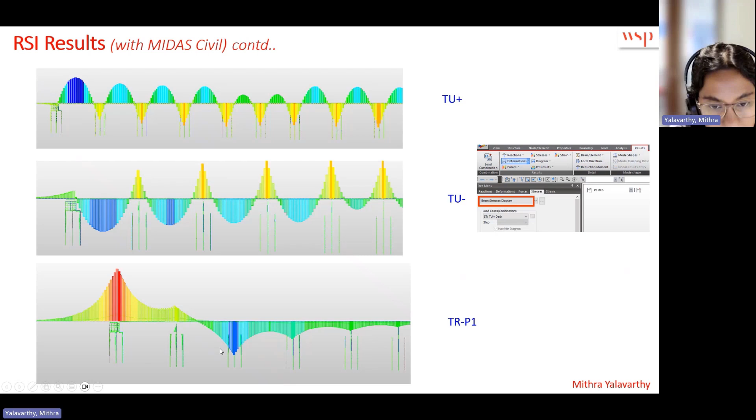So these are the stresses we can find for temperatures in the rail, and for traction. In P1, it is actually causing compressive stress here and tensile stress here. Using a simplified analysis, we can see the stresses. For these ones which are very close to the limit, I would go and check using complete staged analysis.

Displacement checks. So displacement checks, mostly in MTM and ARTC viaducts, the ones at the abutments are very critical.

Mitigation is an important form because firstly, we need to try with bearing articulation. When compared to UIC, our codes stipulate higher forces. UIC has 33 kilonewton meter over 30 meters, but we have almost 40 kilonewton per meter in MTM viaducts over 60 meters. So we are checking against those same limits using higher forces.

So it is very important to consider how we mitigate that. The first thing is we need to check different articulations. Sometimes I check 10 or 12 articulations to find the most suitable one, which governs the track serviceability. So it's not the forces, it's the track serviceability which governs the articulations.

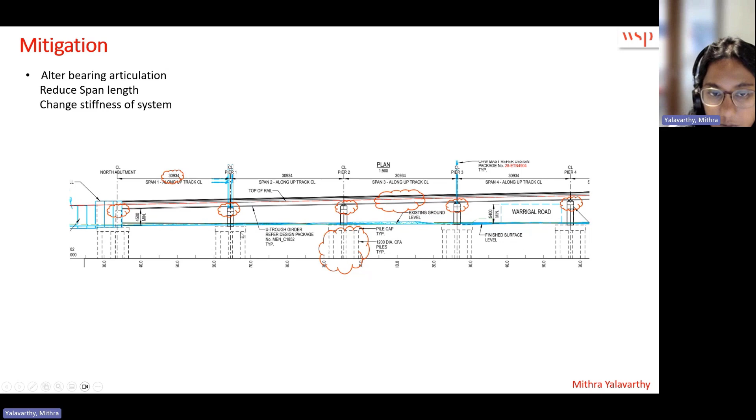In case we do not achieve compliance after trying so many mitigations, then we need to reduce the parameters, but we need authority approval for that. We can consider reduced forces, because the adhesion forces are 0.3 to 0.4 for MTM parameters. Maybe if they can reduce them so that we can reduce the total force. So such parameters need authority approval.

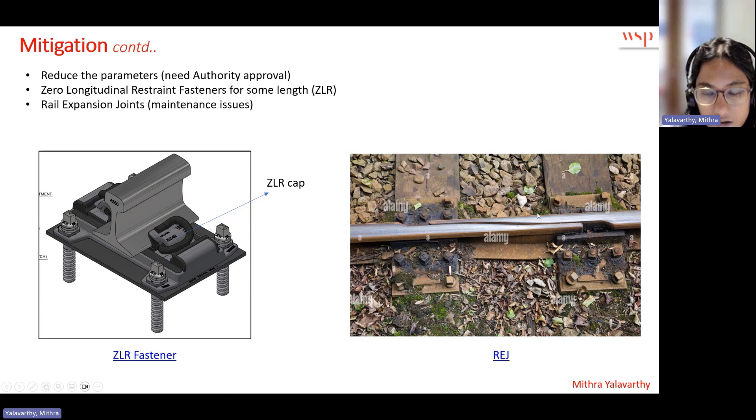And sometimes using ZLRs will be very helpful. ZLRs are nothing but, here the E-clip will be there, but there will be a frictionless material which will isolate these two materials so as not to generate any friction. So ZLRs will be useful in some cases. And the last resort is to use rail expansion joints, which I would say is the last criteria to avoid anything, because this is a heavy maintenance issue. So this is obviously a last resort for mitigation.

So this analysis is heavily parametric. Sometimes I do somewhere around 50 iterations. Doing 50 iterations and repetitive analysis is difficult to do, and also likely to be a little error prone after doing some 40, 50 iterations. So this is where I think MIDAS Civil NX or API capabilities would be really helpful. So that's all from my end. Thank you.

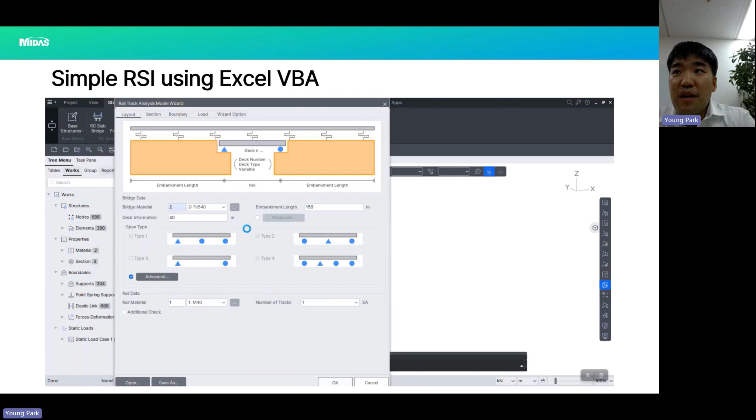As you can see here in the wizard, we just imported an already defined wizard file. Now to speed up the process, a simple Excel API that automatically converts the alignments into curved profiles for all the models can be easily created. Not only are the nodes and elements adjusted, but the local axis for nodes and elastic links are also adjusted so that they are tangential to the alignments. Tasks that could take hours can now be completed within minutes.

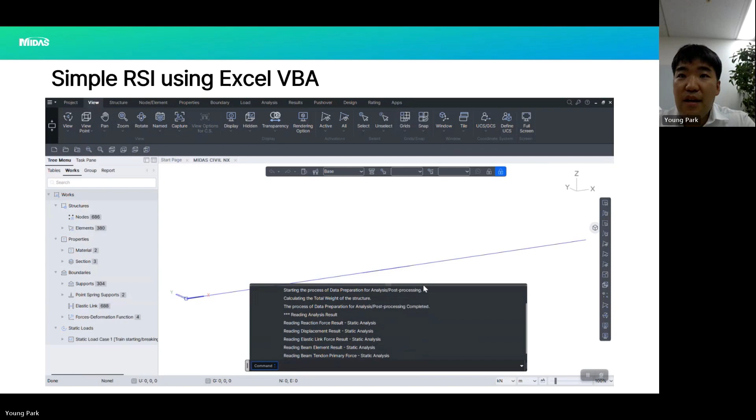You can see here, as soon as we pasted the MAPI key from Civil NX to the Excel VBA sheets, both applications are connected. As we are entering the required parameters thereafter, we shall click on update, and the model, as shown, gets updated to the curved alignment. You can thereby look at the boundary conditions and the required parameters as per the needs of a particular model.

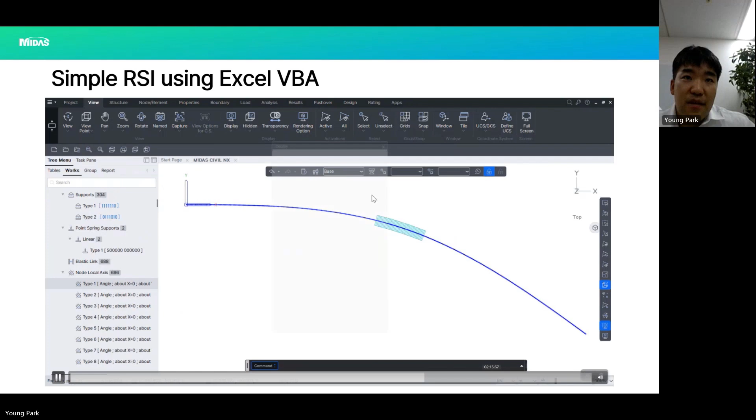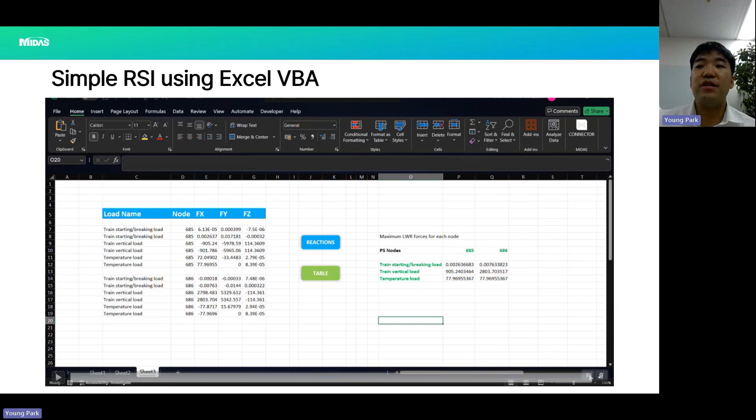Another example of such an API obtains a summary of LWR forces from all the RSI models with a single click. The current report generating functionality does not provide a summary of reaction at the base of pier. Such a limitation could be easily rectified with an API, as being demonstrated here. These are just two examples of how APIs can increase our efficiency in daily tasks. Many more such small plugins can be created according to each organization's requirements, which will not only save time but also increase our overall productivity.

As Shaun highlighted the strength and accessibility of our tech support system, I'd like to follow up by sharing some key statistics that demonstrate the impact of tickets submitted by our users. Our MIDAS support portal has been live since July 2015, and from the very beginning we have been dedicated to providing comprehensive support to our clients.

Since its launch, we have resolved over 52,000 tickets through the portal and addressed over 30,000 inquiries via direct email. On average, we handle and resolve 23 portal tickets per day. Our effort has been reflected in an impressive overall tech support rating of 4.8 out of 5. The portal has truly become our cornerstone of trust, offering engineers reliable solutions, expert guidance, and valuable insight for their projects.

However, while MIDAS continued to gain traction worldwide, we've observed that only a few engineers in Oceania fully utilize our MIDAS support resources. In comparison, nearly 20% of MIDAS users in South Korea engage with our tech support service and benefit from it every month, whereas in Oceania only 5% of engineers do. We strongly encourage our engineering community here to join this global network of MIDAS users and unlock the full range of benefits that engineers around the world are already experiencing.

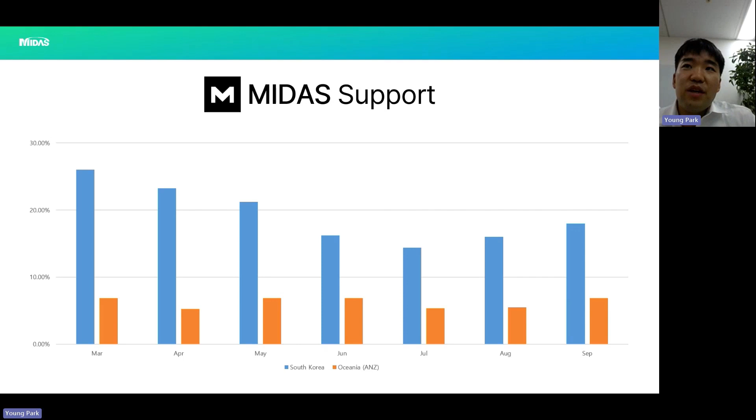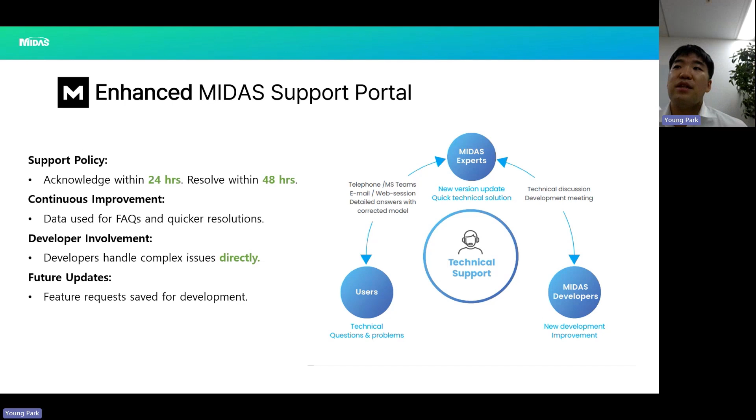Now I'd like to talk about our new developments in MIDAS software. As AS5100 code recently released a new amendment on the 24th of May this year, we are implementing the latest update, such as Amendment 2 of AS5100.5, which includes modified formulation for creep and shrinkage effects. This update is being added alongside the existing formulation to accommodate both ongoing projects that continue using the previous equation and new projects that will adopt the updated provisions. This ensures engineers are equipped to stay ahead and effectively tackle any upcoming projects with the latest standard in place.

Creep and shrinkage time-dependent effects are also updated as per AS3600. And also the compressive strength as per AS3600 is updated.

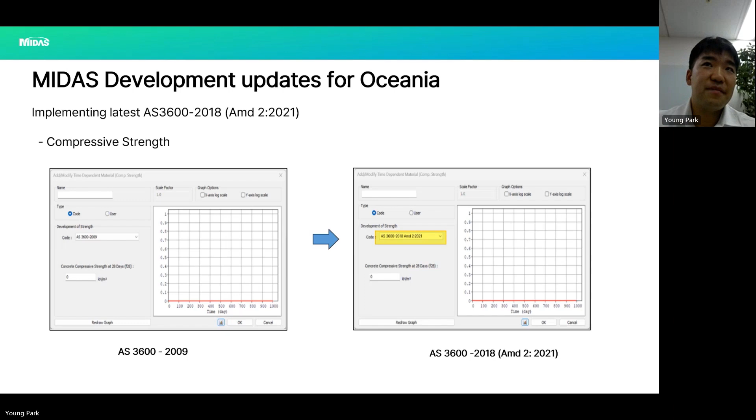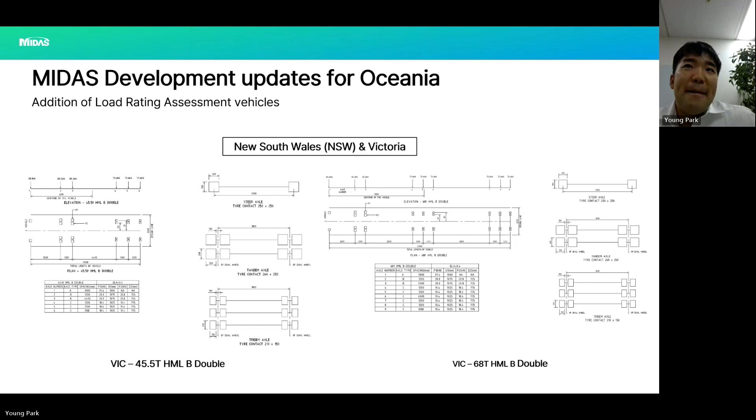The B-double vehicle, widely used in New South Wales and Victoria, has also been added to our database.

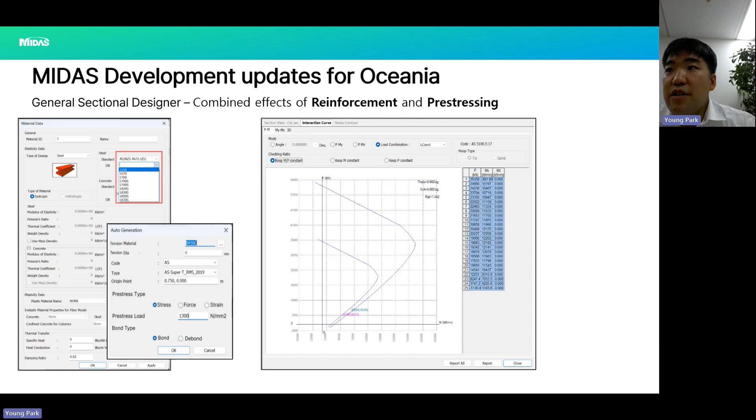Finally, I'd like to introduce one of the most significant developments we've been working on for some time. We are thrilled to unveil the enhanced capability of the General Sectional Designer. Traditional GSD has been a powerful tool for calculating section properties, interaction curves, moment curvatures, and stress distribution for general section shapes based on reinforcement detail. With the latest update, GSD now incorporates pre-stressing as a key factor in section analysis. This means you can now evaluate both regular reinforcement and the effects of pre-stressing forces, providing a more comprehensive understanding of sectional properties and behavior.

As we come to the closing part of today's session, I'd like to take a moment to reflect on our shared journey and our commitment to your success. At MIDAS IT, we are dedicated to supporting your work with innovative solutions and outstanding technical assistance. Our goal is to empower your projects and drive future innovation together.